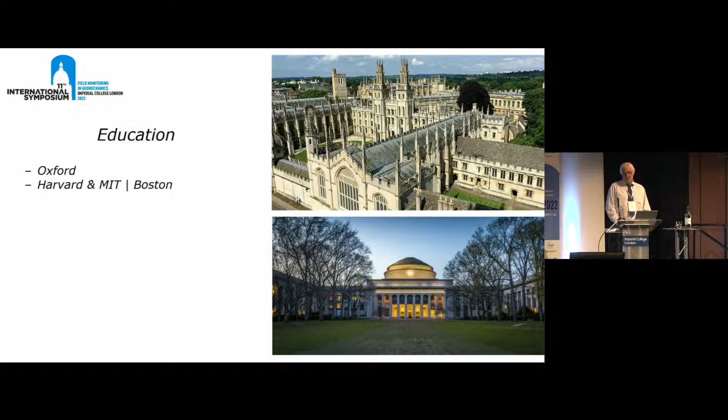That was before becoming an independent geotechnical consultant in 1979. John was well known for his participation in the Central Artery project in Boston, which was a big project that lasted throughout the 1990s. He often lectured about this experience gained throughout this project. But the list of projects he worked on is much longer and included the list here.

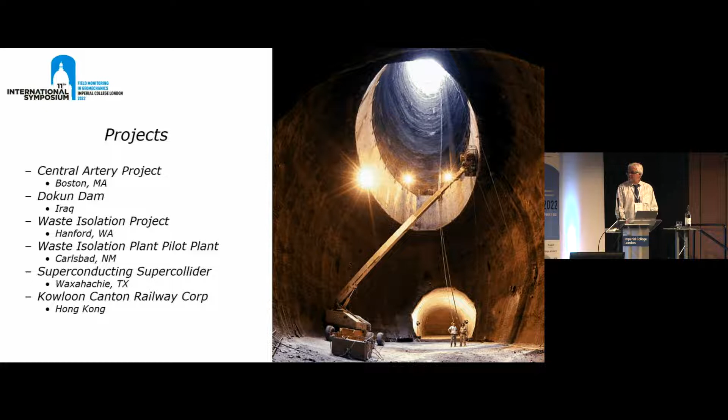Dokun Dam in Iraq, where he worked with Malcolm. The Waste Isolation Project at Hanford in Washington State. The Waste Isolation Pilot Plant in Carlsbad, New Mexico. The ill-fated Superconducting Super Collider in Waxahachie, Texas. And the Kowloon Canton Railway Corporation in Hong Kong. So he had quite an illustrious portfolio of projects under his belt.

As for educational courses, short courses, John was responsible for more than 100 continuing education courses and seminars on geotechnical instrumentation and monitoring. The courses were held or sponsored by the Federal Highways Administration in the USA, where John lectured to most of the US state DOTs. The first courses, as we know them today, were held at the University of Missouri in the USA, then at the University of Wisconsin, and then at the University of Florida.

At the urging of many colleagues, in 1983 John started to write a book, Geotechnical Instrumentation for Monitoring Field Performance. It was published by Wiley as a hardback in 1988, and then republished as a softcover in 1993.

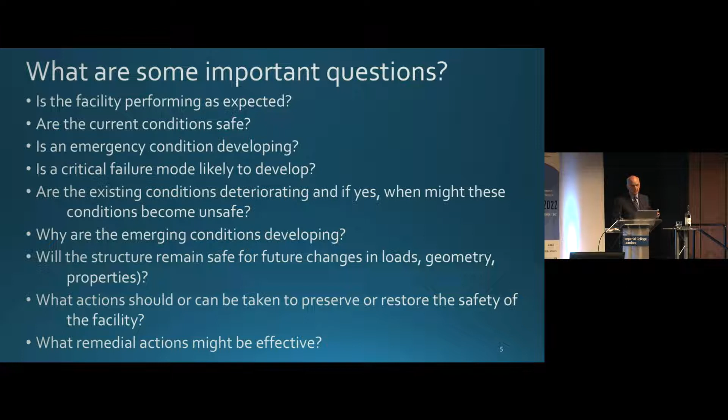Yeah, and with an instrument we can start getting more to the heart of what is the cause of the problem and devise the most appropriate fix. Instrumentation is really valuable there. And what remedial actions we're considering might be the most effective from a performance standpoint, not just the lowest cost.

So I want to shift from that to, as I listened to John talk about questions - and I don't mean to be negative at all about him, I learned a lot from him - but that approach does raise some issues with owners. Now what do you mean? I've hired you, I'm paying you a lot of money to come in here and say what questions need to be answered, and it doesn't always resonate well, particularly with designers.

And so he and I talked, and we kind of got around to the idea that what we're really talking about here is risks, that we're trying to help gather data to help manage risks. You think about instrumentation and monitoring - almost everything we do ultimately is aimed at minimizing, avoiding disastrous risks.

So just to remind us, what am I talking about? Risks are about unknowns and uncertainties. We in geotechnical engineering certainly know a little bit about unknowns and uncertainties, I think, right? We're taught that from the beginning. We have so much trouble characterizing soil and defining it with fixed numbers.

And even when we've done a thorough site investigation and a fairly advanced analysis, we go to a design, go into construction, we still have a lot of uncertainty. Instrumentation starts to reveal the truth. It starts to show us how the site is really going to perform.

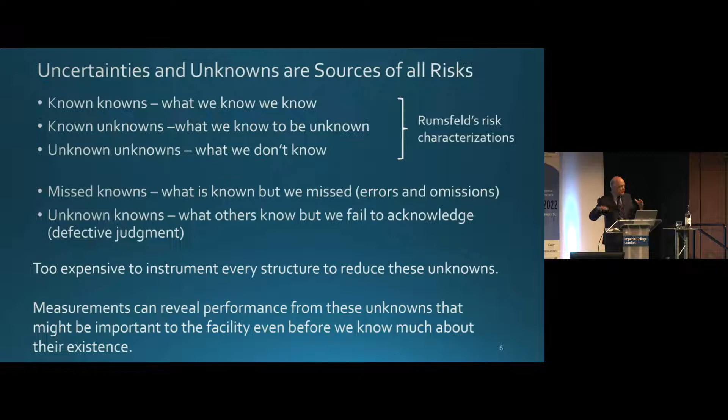Performance measurements can help us. We don't have to reveal all those unknowns, we just have to see what is the performance. We can measure performance and not necessarily know what caused it, but it's enough to help us know whether we need to stop or go ahead. So I think measurements, performance measurements, provide us with a huge bridge across the large quantity of unknown information that we have to deal with.

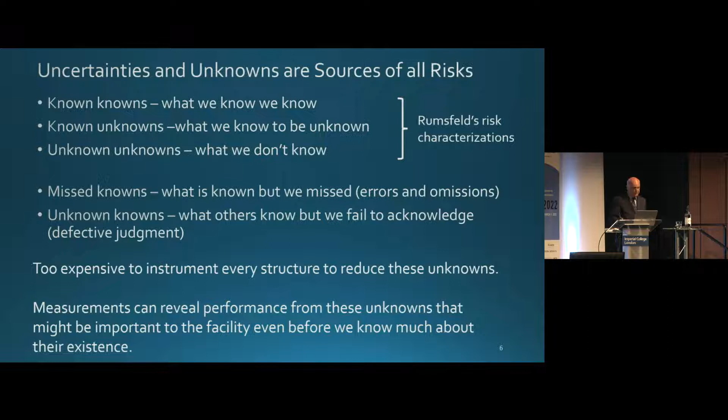Just think of the x-axis as like deformation - how much is the building going to settle? Ahead of time, we don't know. There's uncertainties, we're trying to make a prediction. And our prediction might be a distribution, really, reflecting our uncertainty. It might be 1 inch, it might be 3 inches, it might be 6 inches, it might be 10 inches. We don't know.

But we have some idea that the expected value might be at the peak of this distribution. Those of us in measurements say, okay, that's kind of what I expect to get, so we'll set a threshold value that if my measurement is above this, I'll start getting a little worried, and if it gets above the limit value, I'll stop work.

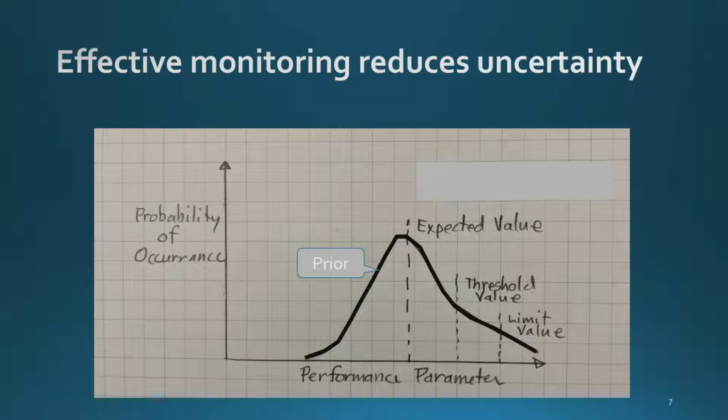It's an interesting way to think about it, because what those values really reflect is the degree of uncertainty we have in our predictions of expected performance. So at the time we're designing and starting to build, we're really dealing with this probabilistic distribution of the expected performance.

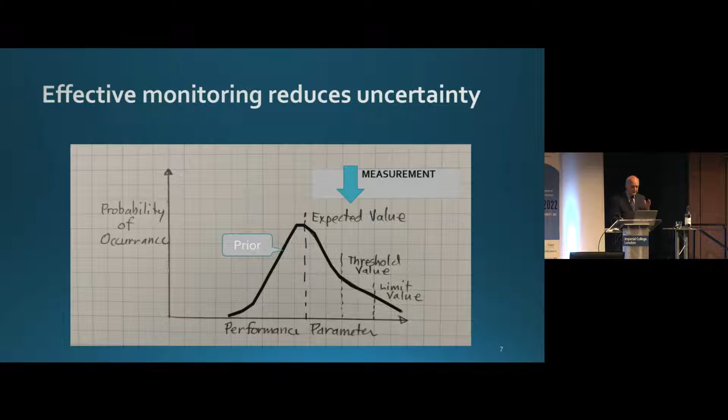The reality is, when we get a measurement, it tells us exactly where we're at. It removes those uncertainties. That's really helpful, really insightful to think that the power of performance measurement is to open up the uncertain world into certainty on a specific thing. I think that's an important insight to help us talk about the value of performance monitoring.

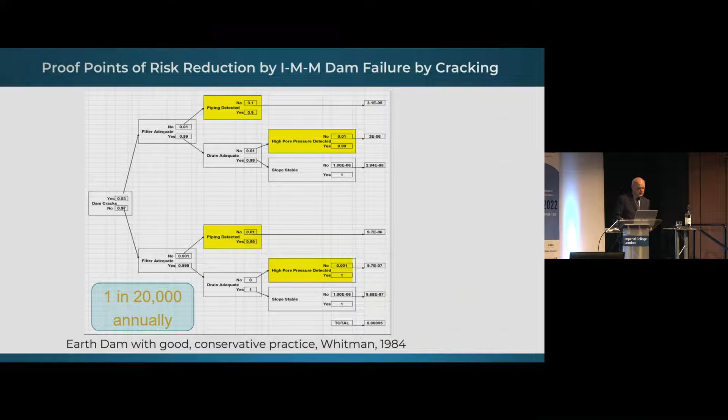Now, I always look for examples, proof points, and I was reading one of my colleagues' Terzaghi lectures, Bob Whitman, great man, very smart man. We were working on some dam issues and the probability of failure of dams. I'm sorry you can't read this event tree, it's tiny, but what's in the highlighted text is what I mean for you to see. What he did is work out an event tree which included branches for instrumentation and monitoring.

So if the dam starts to fail, does the instrumentation monitoring program indicate it, pick it up in time for us to do something about it? This is all worked out in this event tree to say that in a modern earth dam, the chances of a dam failing by cracking, where you have an instrumentation program in place, is about 1 in 20,000 on an annual basis. It's low. Very few dams fail this way.

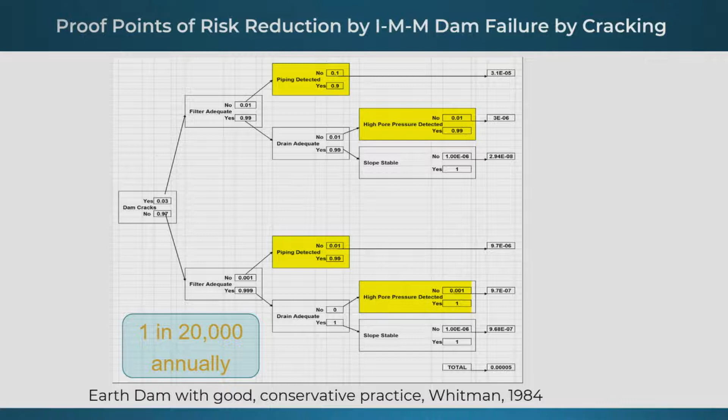But it gave me a great example, because I said, suppose there wasn't an instrumentation and monitoring program. All I have to do is pull out those probabilities - it's not my judgment, it's Bob's judgment. Without that I&M program, the probability of that dam failing in any one year from cracking goes to 1 in 500. That's pretty amazing.

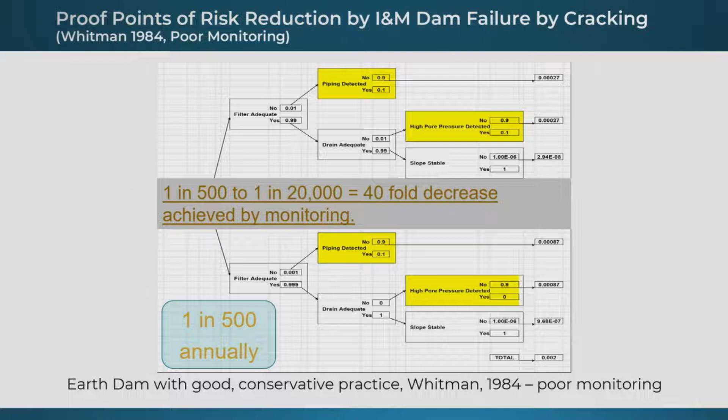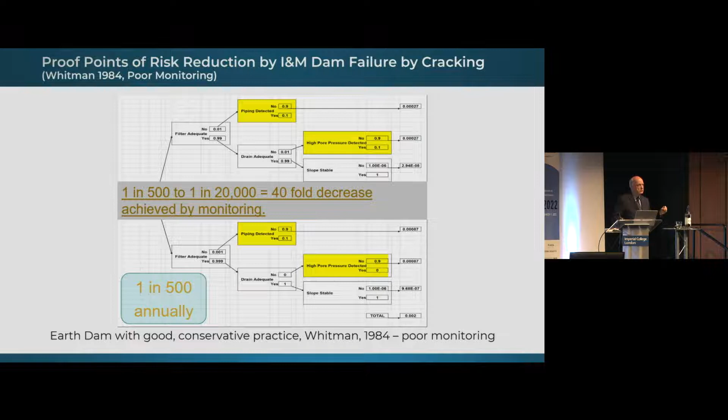That tells us that instrumentation and monitoring properly done for this particular problem, cracking of a dam, can help us reduce the chance of the dam failing by 40-fold. That's a very important factor. I was on a chase here to try to find metrics to tell me how effective monitoring is at helping us reduce probability of failure. This was one really good independent data point.

I had a friend who also had a friend at the Panama Canal, which many of you know, suffered from many landslides for many years in its banks. They had a very insightful engineer, Mr. Alfaro, who had been collecting statistics, and based on frequency of occurrence, he concluded and wrote an internal memorandum some years ago that their performance monitoring program for landslide control on the Panama Canal had helped them reduce failures by roughly one order of magnitude.

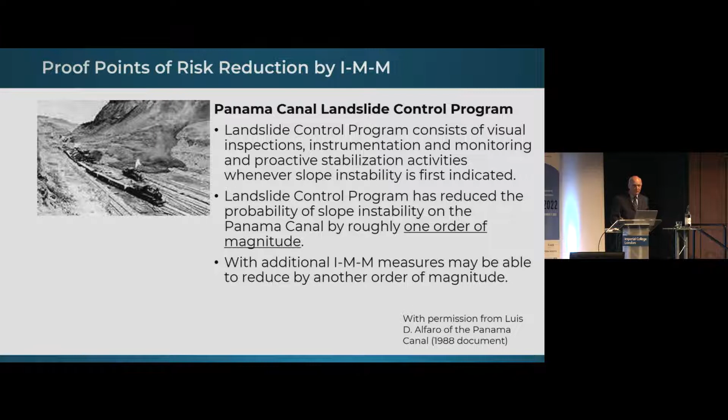I got a second data point now on the benefits of effective performance monitoring. He went on to say that with additional measures they had in place, he felt they were going to be able to reduce that by another order of magnitude. So that's 10 to 100 times reduction in risk possible through the implementation of monitoring programs.

I'll give one more example, some data on the Boston Big Dig, which Tony mentioned and John had worked on. John wrote the essence, the heart of the technical specifications for this major infrastructure project in Boston. It ultimately cost about $15 billion. My company bid on and won the instrumentation monitoring contract for this particular project, which at the time was the largest monitoring contract that I knew of in the world.

The contractors put in the instruments, but then we took over and took the readings and dealt with the reports and answering questions and stuff. It was in a very dense urban area. Here's an excavation that's roughly 33 meters deep, if I remember right, quite deep. And right next to it are all these high-rise buildings.

So major work there. They developed a very simple monitoring program. There's 7 miles of slurry walls for the excavation support system on this project. So very simple: if the walls move inward 3/4 of an inch, that's yellow.

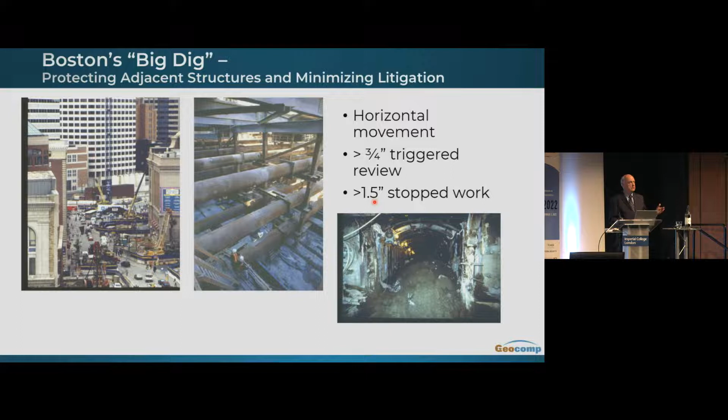If they move 1.5 inches, that's red, stop work. It was very rigorously enforced throughout that 7 miles of construction. There were two problems: one, a concern about deformations, and the other was concern about vibrations. People are very sensitive to vibrations from construction work. And in Boston, we have many lawyers, so every building owner has a lawyer, and that creates problems. So one of the biggest parts of the monitoring program was actually the vibration monitoring activities.

This is a diagram that illustrates, in a common form, peak particle velocity on the y-axis and frequency of vibration on the x-axis. The solid black line indicates the criterion being used on the project, which came from some old US Bureau of Mines study. So here are measurements, over and over again, of the peak particle velocity in buildings and the entranceways of buildings. Despite this being well below the allowable for the project, we had complaints every day, frequently.

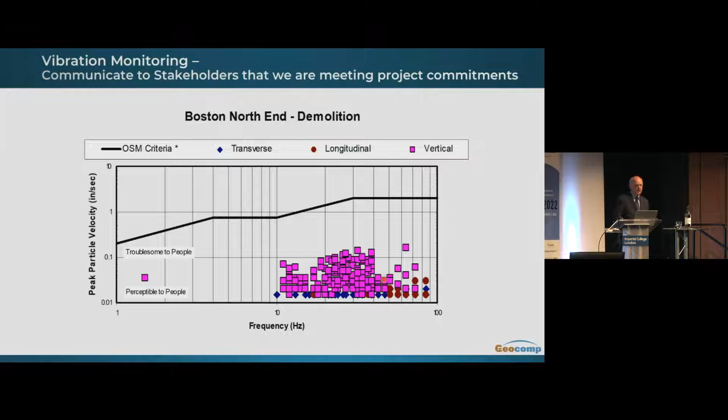So the instrumentation program was really vital. Just this simple measurement was really vital to helping us keep the construction going, even though the community was complaining. It also told us where to try to do some stuff to lower these even farther, to be a good neighbor. But a simple measurement, very valuable to the project. Had we not managed or controlled this, we could have had extensive delays from community disputes and lawsuits.

Fortunately, we didn't. I went back on the project when we finished, after about 8 years, and I'd done some work in risk analysis. This is admittedly a backward look - it's subjective, it's probably got some bias in it, but it is an attempt to capture some data on what was the value of the I&M program to this project. When I did this, I went to the project management team, some of the senior managers, and asked, does this make sense to you? Again, it's very subjective, but they agreed that it made sense. So there's some basis for it being legitimate.

We looked at what are some of the significant risks that would have resulted had we not done this careful monitoring. One was the possibility of collapses. We had several major buildings right within the construction zone of these deep excavations. They could literally have collapsed and fallen into the excavation had we not been carefully monitoring and controlling all that. So there was an estimate of potential damage, or consequence, of as much as $5 billion.

There were 10 buildings, I think. We estimated each one of those was about 0.3%. So you multiply those two together, which an insurance company would do, and you get some estimate of the possible risk cost from that failure mode. Then major damage and disruption to buildings - cracking, stuff requiring major rework - same kind of calculation, potentially a risk cost of about $200 million over the project.

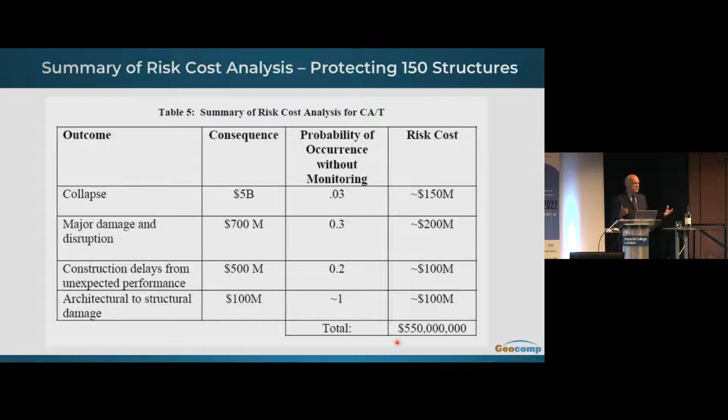So that all adds up to about $550 million - pretty serious money. How much did we actually pay due to these kinds of losses on the project? We paid $9 million to fix one building - a pretty politically connected guy, his famous building cracked, and it took a lot to fix it. So we had a potential risk loss of 550, we only paid out 9, and we paid 60 for the monitoring program.

Looking at it simplistically, this approach, which was a very aggressive monitoring approach at its time in the 90s, saved the project $500 million in risk costs. That's pretty darn convincing of value returned from a monitoring program. Keep in mind that word 'value' - as the rest of my presentation goes on, you're going to hear that word over and over again. What is the value that we are bringing to projects and to owners?

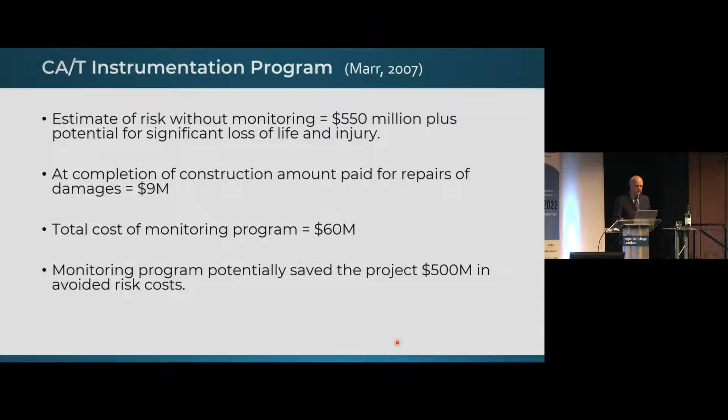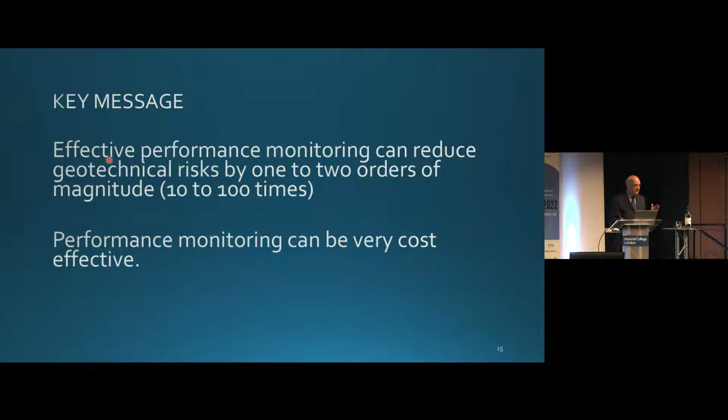Effective performance monitoring, as I've shown you, can reduce geotechnical risk by one or two orders of magnitude, and it can be very cost effective if it's carried out right. I'd emphasize this word 'effective' - just putting an instrument in the ground doesn't change anything. You've got to do the systematic approach that John talked about. So let me show you a few examples to illustrate these points a little bit.

Here's a bridge we did some years ago in Washington, D.C., called the Woodrow Wilson Bridge. It had to be raised but couldn't be raised enough to get ships through, so it's still the only lift bridge on I-95, a major north-south road in the U.S. To do this, the approach embankments used MSE walls, very high, 60 feet high, on very soft soils in a very crowded work setting.

So this is one of the MSE walls. This is a drill rig next to that MSE wall. Anytime you're in this condition and you see a drill rig, you know there's something wrong. And this is an inclinometer that was sitting there showing the lateral movement of that MSE wall as it was being constructed.

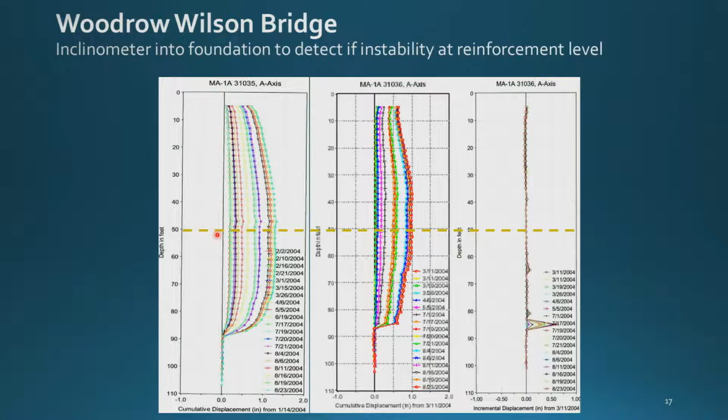What we were worried about is that MSE wall at the base of the embankment had the highest strength reinforcement made at the time. This is plastic material put in like reinforcing steel to help hold the embankment from squeezing out. So we had a lot of instruments on that to make sure that man-made material was serving its purpose. And that was all doing good.

It didn't move there. The problem is we had movement starting to occur down here on this inclinometer, deeper in the original foundation. This is the kind of stuff John was really good at - make sure the inclinometer goes deep. And in this case, we had it deep enough.

We picked up sliding occurring along an old ancient slip plane in this over-consolidated clay. No one anticipated that. If we had not had this instrument in place, this whole thing would have slid. If we'd kept putting fill on this embankment, it would have slid and we would have lost access and a year of construction time. Huge value from one instrument.

And so that's just one example of the kind of value. It's an example too of many times instrumentation reveals unknowns that we didn't think about, we overlooked, or didn't consider when we were doing design.

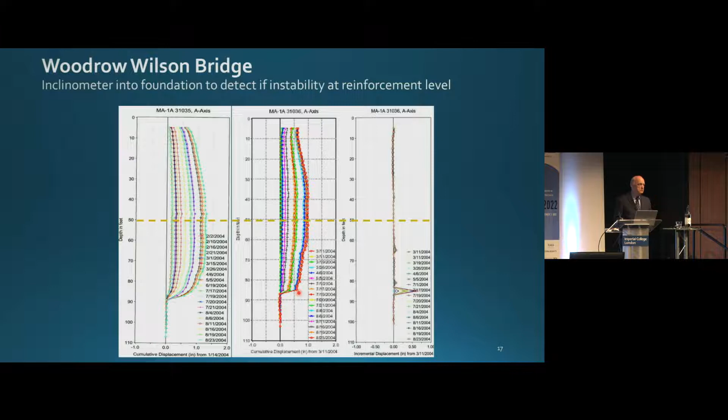Here's another example, one of the few new hydro plants built in the United States. This is Low Head Hydro on the Ohio River. It's built in a deep excavation, 100 feet deep, next to an existing Corps of Engineers dam. And the Corps is very finicky about its dams.

Thou shalt not move my dam. Thou shalt not hurt my dam. So we figured a smart way, a helpful way to do this, would be a lot of instrumentation, real-time monitoring. In order to build this, I helped do the engineering on this as well.

They're like 49 strands with 35 kip capacity each, if I remember right. We also had to deal with an existing fault plane that we had identified in the site investigation, coming underneath the toe of the Corps of Engineers dam and across our site. So it was really critical that these rock anchors work, that they take up the load they need to hold this water force back and hold this rock in place.

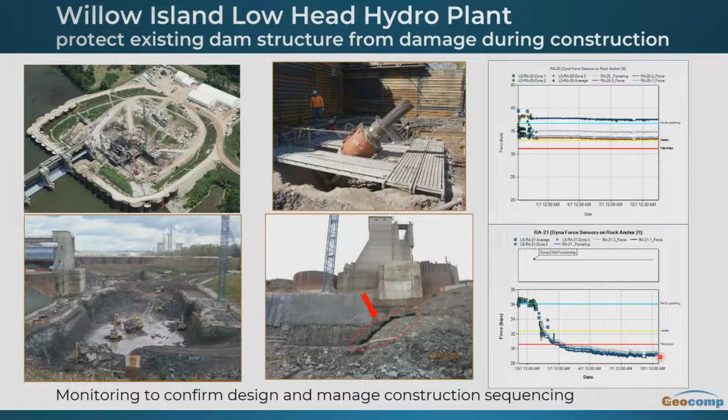So we had to accept the fact, let's just live with it for a little while and see what happens. It lost a little bit more load and then it leveled out, and we could live with that because the adjacent tiebacks could take up those loads. So this is an amazing story of how new technology can come in and help us if we're careful.

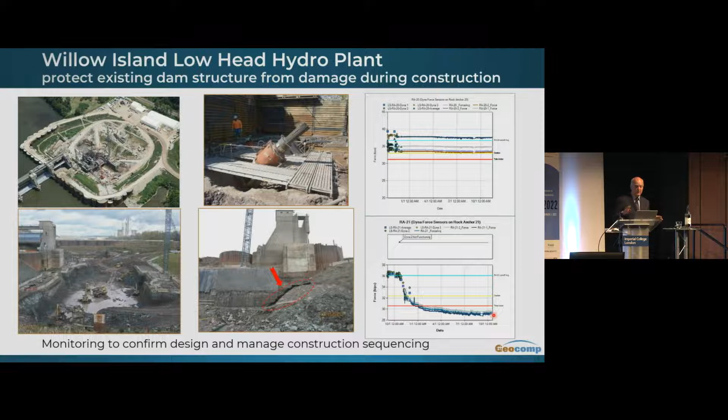It doesn't always work so well, and in fact, when these were first put in, they gave us a lot of crappy data. It turned out to be a poor installation, and we cleaned that up, and then you can see what the result was.

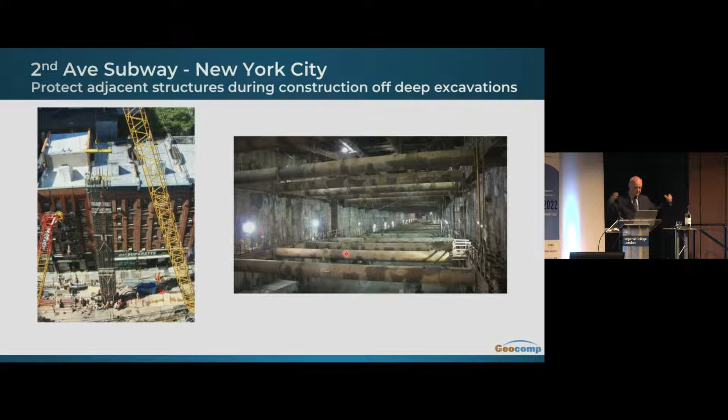We were the instrumentation contractor, working for the contractor, and I said, this ain't never gonna happen. And he said, well, what do you suggest we do? And he said, well, we have no choice. You bid the job, we gotta do it. We'll learn as we go.

Kind of sounds like the observational method, doesn't it? We didn't call it that, but the idea was, as soon as we triggered this, we went in and said, hey, look, there's nothing wrong with the building. There's no harm. We can't foresee this building having any serious damage for another 2 inches of settlement or so. So the limits were revised upward.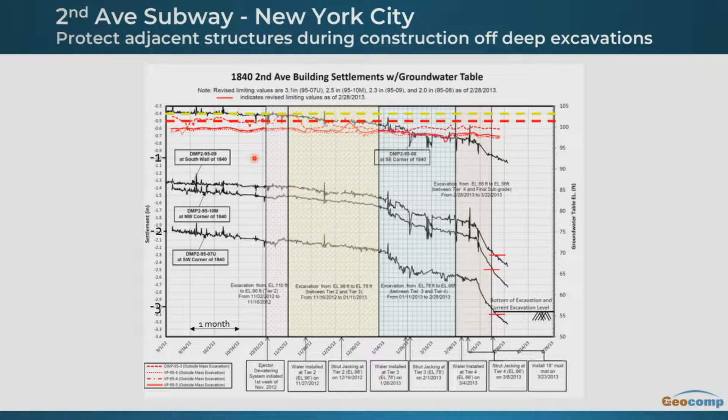That's a key message I try to get out to people: limits are there to be considered and revised if needed. Many contracts, though, give it, and the contract administrator thinks that's fixed, that you're cheating the game if you're trying to move it, trying to change it.

We revised the limits on this. I mean, I personally took responsibility for revising the limits on this, I think it was 3 times. And we got down, eventually this building settled a little bit over 3 inches. We're starting to get real worried.

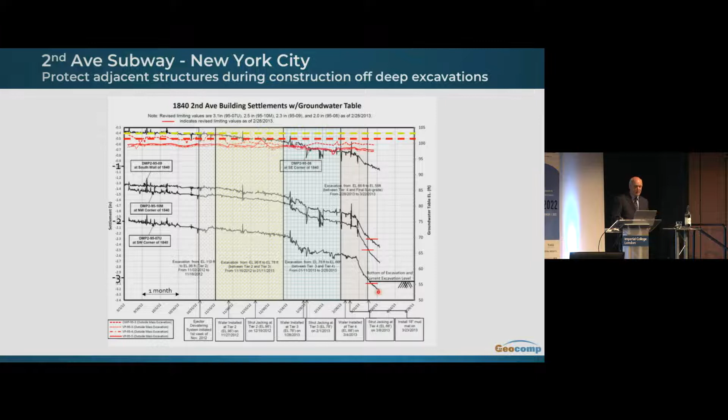You see it took off here as we were getting toward the bottom of the excavation. We went to the sequential part where we just took out a little bit, put in a strut, and watched what happened, poured the bottom, and then moved over. That worked very well, and we were able to succeed. We could not have done it without the instrumentation, though, telling us. We knew we were in a tough spot, but the instrumentation was allowing us to move ahead.

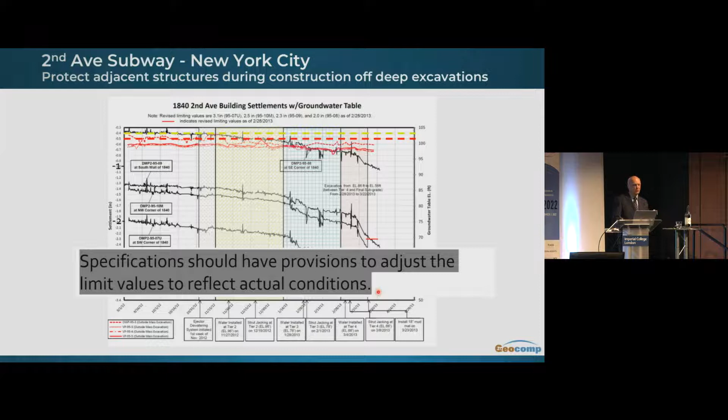So again, specifications should have provisions to adjust these limit values to reflect actual site conditions. Limit values are set up front where you don't know so much, but as you get on the site and start working, you learn more, you see how the structures are behaving, and you ought to be capable or allowed to adjust them to actual site conditions.

This is an example of some of the damage that happened to some of those buildings. Joints, we've got cracks here - I think this one is up to 1 inch wide. Got cracks within the buildings. This was someone's bedroom, if I remember right, another bedroom.

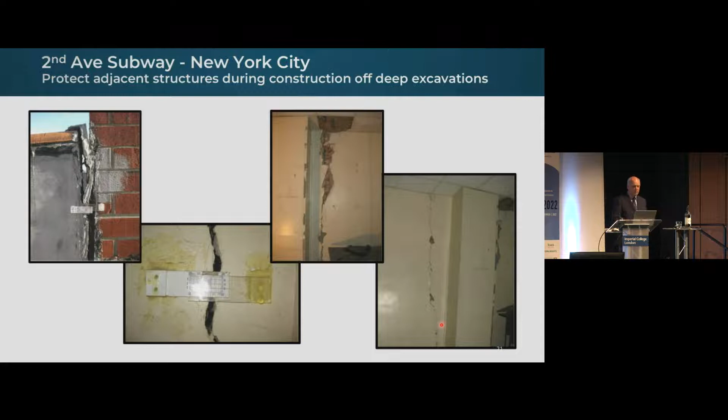To lay people, that looks kind of serious, but from a contracting standpoint, this is easy to fix. These aren't structural, they're visual, and so we deal with that a fair amount, as long as we've got instrumentation to help us be sure of how the building is moving and how to interpret these cracks. Don't know what happened here, somehow I got something in there - let's go to the next slide.

This is a bridge, another example of an old bridge. The new bridge has got to be built because this one is obsolete. The new bridge is coming beside it, and new piles have to be driven. We're very worried about settling that old bridge and it literally collapsing into the river as we're doing this work.

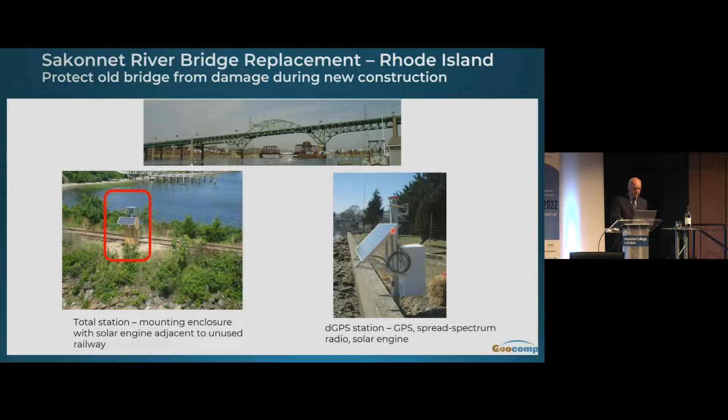So we put in a monitoring system on that bridge consisting of automated total stations, robotic total stations. And then to be sure that we had it right, we backed that up with some differential GPS just so that we knew that this unit wasn't moving. This uses satellite data to tell us how much things are moving in X, Y, Z. Amazing device, good to about 1 millimeter and works day and night. So we had good luck there.

We got it all in. We had several hundred instruments on this to monitor deformations as well as strains in the structural steel. We're sitting around one day, people are sitting around, and all of a sudden the real-time monitoring system sends off emails to multiple people, some who are having lunch, and it says the deformations have exceeded the limits, there's something wrong. What's the first word out of the contractor's mouth?

"Your instruments ain't working." That's what we always get. So we send some guy out to see what the contractor is doing, because our answer is always, you're doing something you didn't tell us. Turns out the contractor had decided to drive a sheet pile for getting ready for one of his pile templates for his main 6-foot diameter piles. And it was very close to one of the piers for this old bridge, founded in silts, very sensitive silts. So that smaller pile driving operation, but a little closer, caused this foundation to settle immediately half an inch.

Wow, that was a wake-up call. It said, yes, this foundation is really sensitive, and we better be careful going forward. That in itself was worth an enormous amount of stuff - we got credibility with the contractor that he had to be careful. Fortunately, we were able to use the strains on the structural steel to say no harm had been done. They came in and, again, using our instruments, were able to jack it back to where those stresses were restored, and went on and completed the job without a problem.

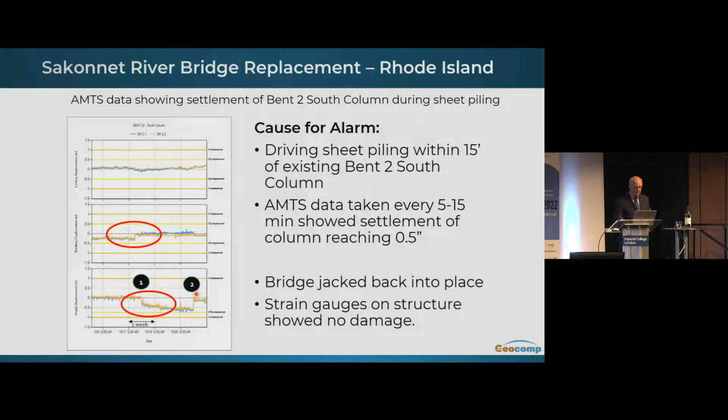So this is an example of unexpected, unanticipated benefits of a good proactive instrumentation program. It tells you the truth, right? And it tells you the basis to argue against the doubters and gives you a basis for how to fix a problem. Another example - and this is where you were using instrumentation in a different way.

If you assume a hydrostatic condition below this line, as I said, we went in and put in piezometers, grouted-in-place piezometers, and measured the actual pore pressures at different points. This represents how high the water actually was at this point, and how high it was at this point. That's way below the phreatic surface from an assumed simple condition.

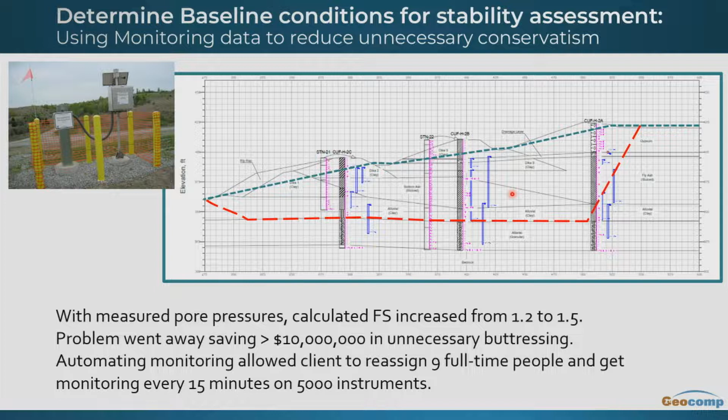That means the pore pressures along this failure surface are less than half of what that conservative assumption was. When we took that into account, the factor of safety calculated for this condition went from 1.2 to 1.5. That's huge. The problem just went from a $10 million buttress to fix this project to no cost, and much more confidence in the actual safety. That's all brought about by good practical use of piezometers. We don't do enough of it in much of engineering.

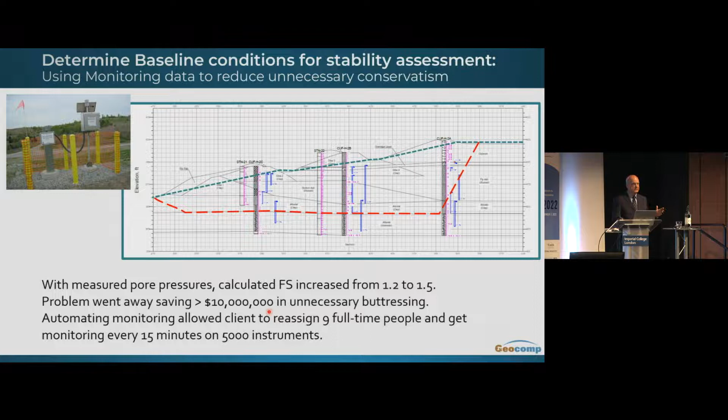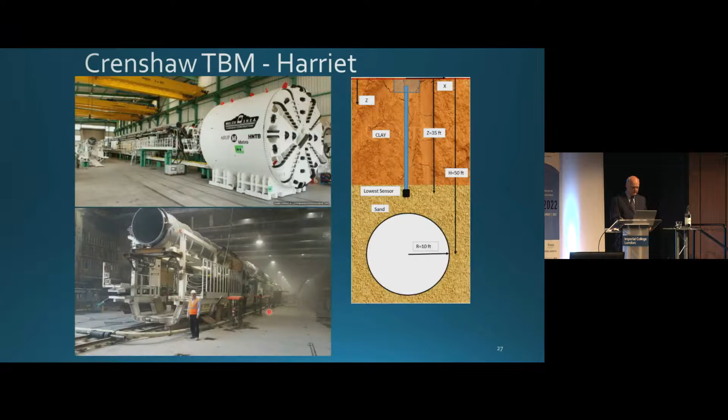Believe me, this paid for itself many times over. In fact, we wound up redoing the full monitoring system for this client, and they had 10 people working full-time trying to keep up with all their 5,000 instruments. They now do it with half a person, through automation. Those are huge benefits to companies, and we need to try to pull those out. That's huge value generation to a client. I'm going to skip this one in the interest of time, although it's a great story.

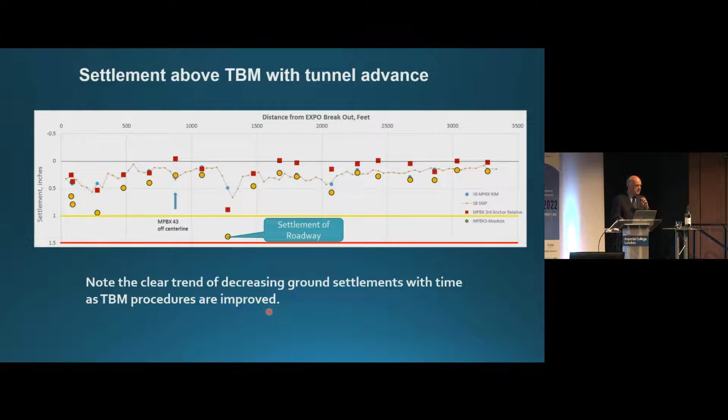It's meant to illustrate how, on mining with TBMs these days, using instrumentation as feedback to the operator, we're now able to control settlement of the streets to zero. That's really a great step forward. This was a project in LA where we were able to get to that. By seeing if settlement's occurring, they alter their tail grout operation so that it's really able to keep that street at a constant level.

One interesting side effect of that same project is on the stations. These are open-cut stations with retaining walls with cross-lot bracing - not rakers, cross-lot bracing, I'm trying to think what the British call it. Normally, when you do a deep excavation with a strutted supported excavation, you expect the ground outside to settle. Every engineer knows that, right? At least in Boston, that's what we always think. In this case, the engineer had predicted that the elements outside the excavation would settle about an inch.

So we've got all these points measuring settlement outside of and around the excavation, and they're showing data that at this point there's as much as almost half an inch of heave. So who called me up and said what? 'Your instruments are wrong, they ain't working, you've got them upside down, you've got your reference points wrong, something's wrong.' Oh no, we know what we're doing. This is right. 'No, we don't believe you.'

So I had to pay for a surveyor to come in and independently check all this stuff. He was right, we were right on the money. We had it right. So everybody's scratching their head, wondering what's going on. And they look to us as the instrumentation contractor. Look, I'm just an instrumentation contractor - I happen to be a geotechnical engineer too, but I was hired there to be an instrumentation contractor.

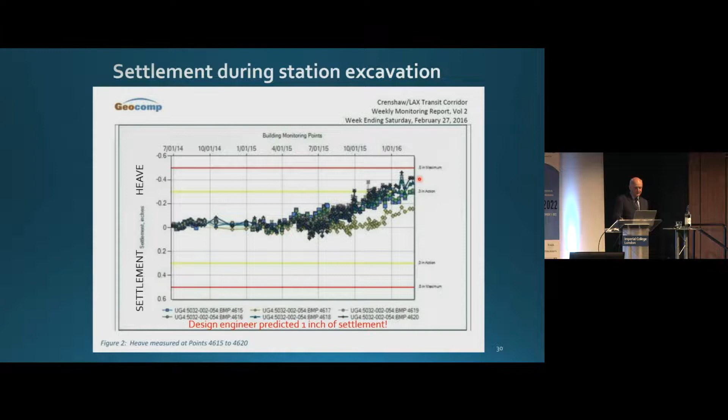So let's see, one more I want to show where I'm just baffled sometimes at where we get caught, and instrumentation saves the day.

We went out and set up an automated total station. We measured this over a period of 8 months, and sure enough, it was moving. This thing was coming off the mountain at a pretty steady rate. And nobody could figure out why that was happening.

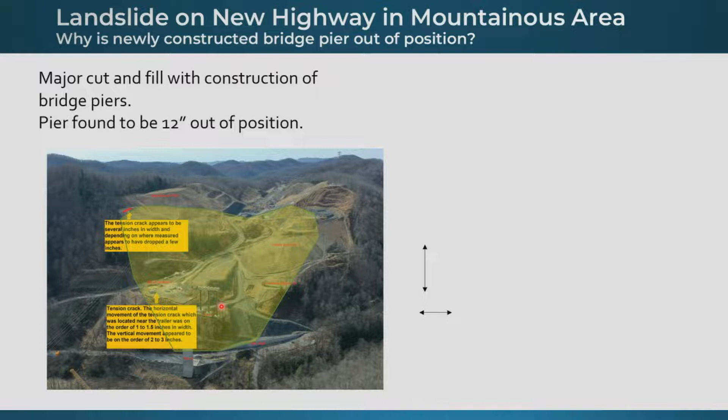We were involved doing a site investigation and went and put in piezometers. Whenever you see a slide like this, pore pressures are inevitably involved. I went back and looked at the original contract borings. They didn't show any pore pressure. All the borings were dry. So how could there be pore pressures here?

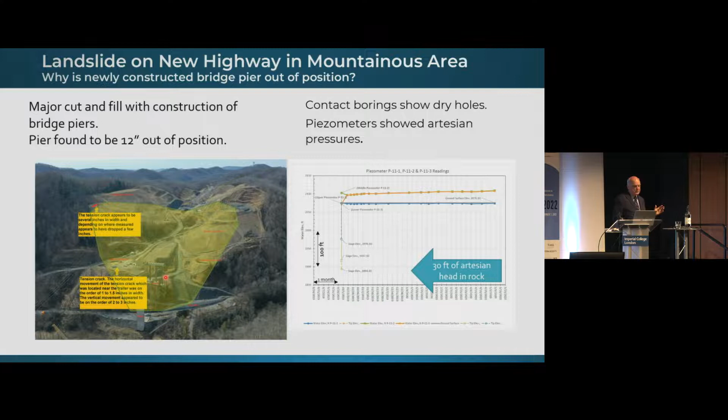So we put in piezometers. The piezometers not only showed pore pressure, they showed artesian heads in some of the rock. That means water pressures above the groundwater level, above ground surface. Artesian heads of as much as 30 feet in part of the rock. And that part of the rock also had a pre-existing slip plane in it from old geologic forces. So here we go from contract borings saying dry holes to piezometers during the actual construction showing artesian heads. That's just total topsy-turvy of what was anticipated.

So what's the solution? Put in horizontal drains. 'Oh, they never work, what do you mean?' 'Oh no, they're always clogging.' No, you've got to do stuff right. You do stuff correctly, and you do enough of it, and they will work.

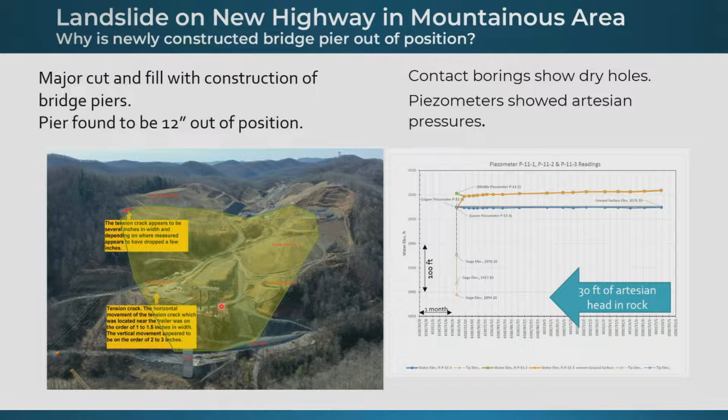So we convinced them finally. In fact, I said I'll leave the job if we don't do horizontal drains. We did horizontal drains. Here's just one of the drain pads. I think you can see water coming out of those 1.5-inch pipes. In fact, we get about 200 gallons per minute after a rainfall on this mountainside.

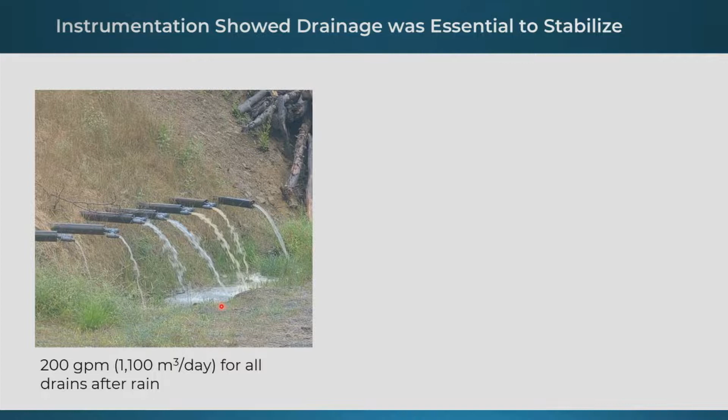Huge water pressures were building up at times and creating the instability. Once we put those drains in, here is a plot showing the movement of that pier over time. The scale here is 6 inches of movement, and it almost got to 6 inches. Here's where we got the horizontal drains in and working, and the movement stopped.

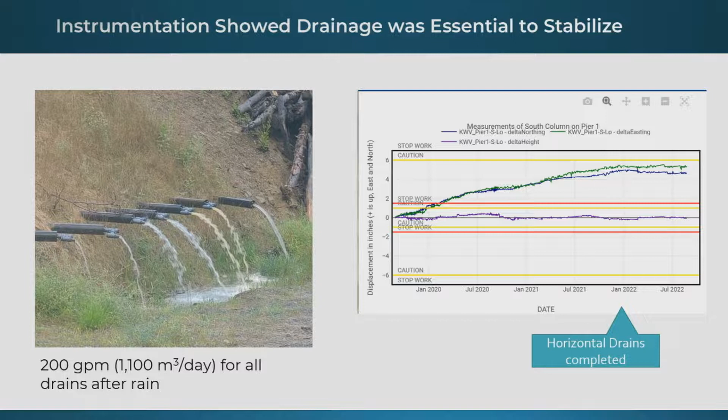That's a hell of a convincing story. That's a place where we can go back to the owner and say, we have solved this problem. We've got the hard data to prove it. This is not theory, this is reality. And we can go to court and win a court case for a differing site condition, hopefully. Again, instrumentation playing a very key role.

I'm going to skip this one.

Monitoring delivers value in safety, improving safety, saving time, saving money, and reducing risks. We need to develop and execute our monitoring programs with these objectives in mind. How are we saving money? How can we reduce risk? And then we need to document these, because these are value statements.

This is how we help owners save money and save time. And we don't do enough of this in the monitoring world. We do a great job of putting the instruments in and collecting the data and making nice plots, but we don't translate it into value statements. I'm going to talk some more about that.

So key components of monitoring: visual surveillance, and that's just as important as it ever was. It's becoming more of an issue, though, in some ways, in that we're automating all this stuff and our people aren't in the field anymore. So we don't get that daily feedback on many of these projects.

We've got to put in the appropriate and reliable instruments in the right places. So many instruments don't go to the right place. They don't think about what is the expected performance mechanism here, and then where do I put the right instrument to detect that particular performance mechanism.

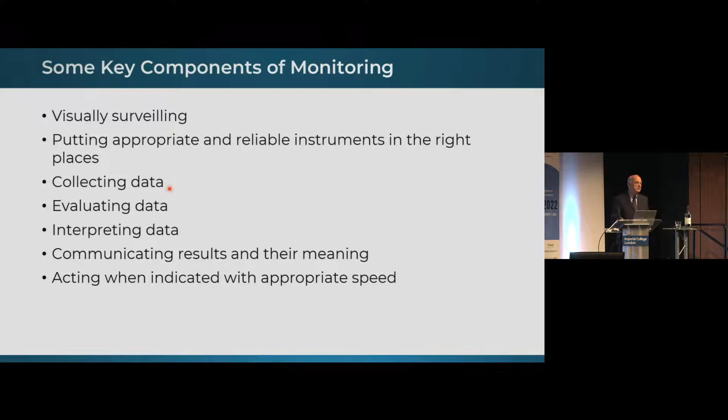Collecting data, you all know about that. Then evaluating and interpreting data, communicating the results and their meaning, and then acting when something is indicated that needs to be done, acting quickly or with the appropriate speed. Again, to go into these in a little bit of detail: visual surveillance - Ralph Peck said the most valuable instrument we have is the human eye connected to a working brain. And that word 'working' is really important.

And he was absolutely right. As I indicated, automation has kind of taken us out of the field, but there's a new technology development that's bringing us back, and that's these wonderful remote pan, tilt, and zoom video cameras.

I'm just now putting a bunch of those on some dams in Puerto Rico. I'm amazed at what they're going to do to feed back to a central room and let us look in on a dam after a storm and see, is it overtopped? Is it losing water around the sides? What's happening at the tail downstream end? Just incredible technology, and costs have come way down. We're going to make a big deal out of this.

And then drones with a camera and positioning, so you know where you're at, is also adding a lot of new capability to us.

One of the things on my list was evaluating and interpreting the data. We need to be careful there. There's a difference between evaluating and interpreting, and different people are good at doing these two different tasks. We confuse them a lot. Evaluating means making sure the data are good, making sure they're solid, tight, believable, error-free.

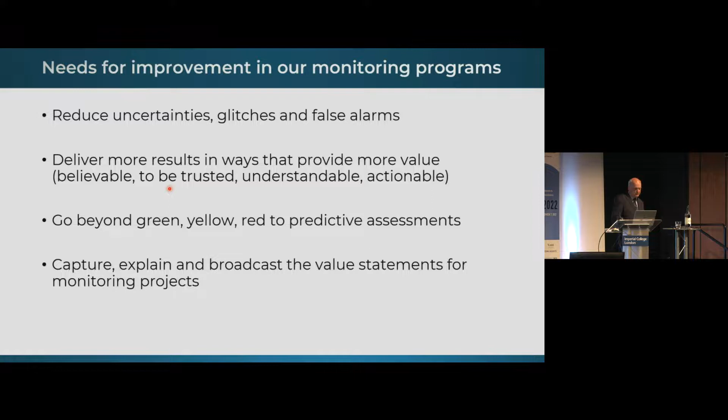So, thinking through all this, I thought I'd put together a few pointers on improving things we could do to improve our monitoring programs. We certainly need to reduce uncertainties in the delivered data, glitches and false alarms.

Every place I go that has an automated alarm system, people complain about false alarms. I've just been through several major dams, fairly new dams with instrumentation, and half of it isn't working. And why? Well, I don't know, but that's not good, and it doesn't reflect well on our industry.

We need to be delivering results in ways that provide value. That word keeps popping up here. That means the data are believable, they can be trusted, they're understandable, that whoever's receiving that data knows what they mean. In these days of higher technology, I worry that we're delivering stuff that's just hard for others to understand. And in this world, many of our clients are not engineers, and yet they're still responsible for the facility.

So we need to work hard to make some of this stuff understandable, and it's got to be put into a form that they know what to do with it. That is actionable data. Just delivering a bunch of volt readings that are all reliable, everyone's there, nothing's missed, but it's voltage, doesn't give them any actionable data at all. They don't know what to do with it, and they can't use it right away.

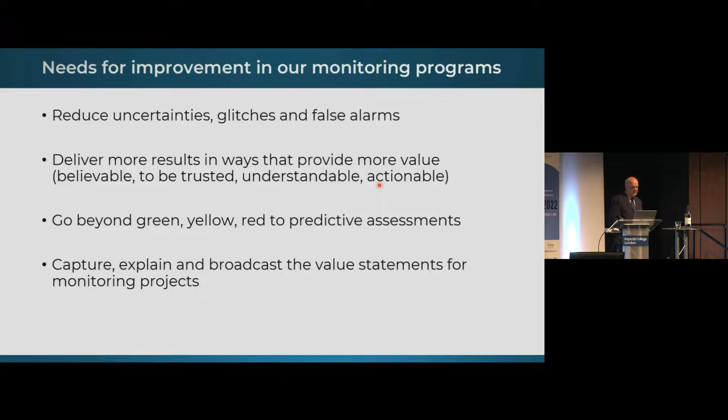There's also some things that feed into these things that don't go well. I tried to make a list of some of these things that really stand in the way of us doing better I&M projects.

One of the very first ones goes back and violates a rule that John gave us in his systematic approach: every instrument should have a purpose. That's very simple, very clear, and yet many projects I'm on, I got a list of instruments, no idea what's the purpose of the instrument. That really should be front and center. In fact, I'd love to see a table that shows the purpose of the instrument, the range, the trigger or limit levels, and how important it is to the project at what phase of the project.

There's a whole bunch here I won't go through in detail. Many of these are obvious to you. John always talks about planning, or what many of us talk about. Plan before you ever go to the job, but then what happens to the plan?

Instrumentation crews seem to be made up of a bunch of cowboys. Everyone knows the best way of doing it, and they just go out and do it their way, which usually means it doesn't work the first time. So we have a lot of issues in instrumentation with reworks, and I'm being honest, that's at least with some of our crews. We just got to up our game and be much more diligent about perfection every step of the way. John used the example of a chain is only as good as its weakest link.

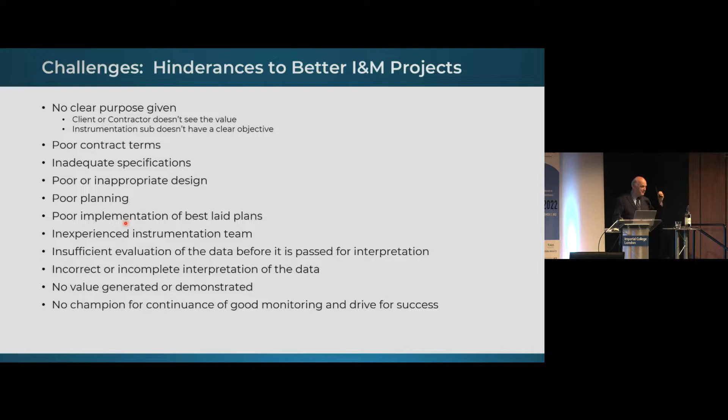John used to also say, keep it as simple as possible, right? KISS. To him, that was a very, very simple thing, like a ruler and a pencil. What do you have to say about this guy? That's about the most technologically sophisticated device you can have, yet we all rely on it. It kind of violates the keep it simple, stupid rule, but we rely on it. Let's go on from there.

We can say all these things and talk about the gadgets. We'll hear a lot of that in the next day or two. We've had a very sobering experience in the last 2 years with the failure of the Brumadinho Dam in Brazil, a tailings dam. I'm going to quote from the expert report done by the Vale expert panel.

I'm going to read it. The failure, this was, by the way, most of you have seen it, I'm sure. It killed over 200 people. It was a liquefaction failure, very fast once it got going. The failure is unique in that it occurred with no apparent signs of distress prior to failure.

High quality video from a drone flown over Dam 1 only 7 days prior to the failure also showed no signs of distress. The dam was extensively monitored using a combination of survey monuments along the crest of the dam, inclinometers to measure internal deformations, ground-based radar to monitor surface deformations of the face of the dam, and piezometers to measure changes in internal water levels, among other instruments.

None of these methods detected any significant deformations or change prior to the failure. That is really a very concerning statement to me. Now, I'm not getting into the details of this. I actually have done some work on this dam. I can't get into the details of it, but I think it's a wake-up call to many of us, as we can do better than this, and I know we can do better than this.

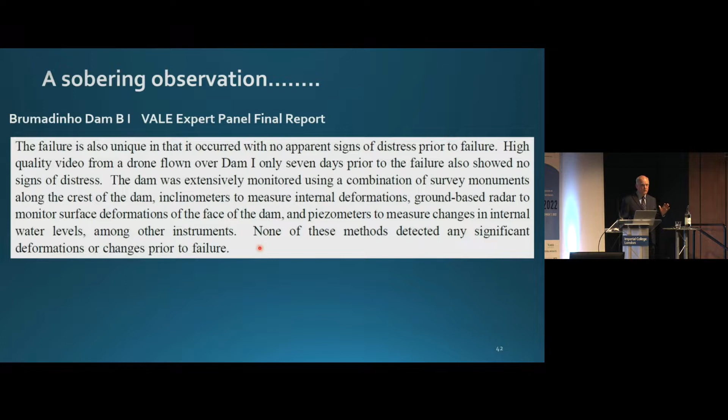But this doesn't sound well for our industry. We need to fix this. And we fix it by doing what John told us to do: systematic approaches, well-designed, well-executed designs, and then getting the data and doing something with it properly.

I wanted to talk a little bit about increasing the market for I&M services, for monitoring services. I would allege or suggest that we can do that by delivering more value and making clear to our clients and customers that we're doing that and what that value is. We've got to demonstrate and communicate value.

We can deploy new technologies where they work, or when they work and provide value. By that I mean, don't get out too fast on a new technology. When it's proven that it's going to deliver good results, believable results, and provide value, then we deploy them.

And then we can develop broader applications of some of our work. I think there's new things coming that we can do well beyond what we typically think of as geotechnical monitoring.

So in terms of delivering value, there's some rules of thumb here. Setting realistic client expectations and delivering on those is just a basic thing. Too many people will oversell and underdeliver. So you got to reverse that. You got to underpromise and overdeliver.

I think we should be trying to do a better job of integrating design, construction, and monitoring teams for interpreting data and executing contingency work. We've heard others talk about the separation. We need to pull people back together. Understanding data and what to do should be a team effort, and it definitely needs to involve the designer who knows the design intent.

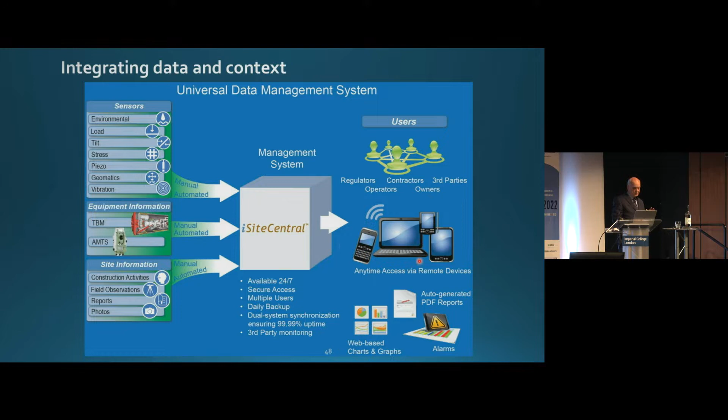We can do a better job of integrating data and context, and this is just an illustration of where today we're able to bring in not only data, but site information, photographs - almost anything can be put into server farms now and then delivered out to the end user, including to their phones as we show here. There's real value in this because you're communicating information quickly, efficiently, and accurately. And so people can make decisions and move on.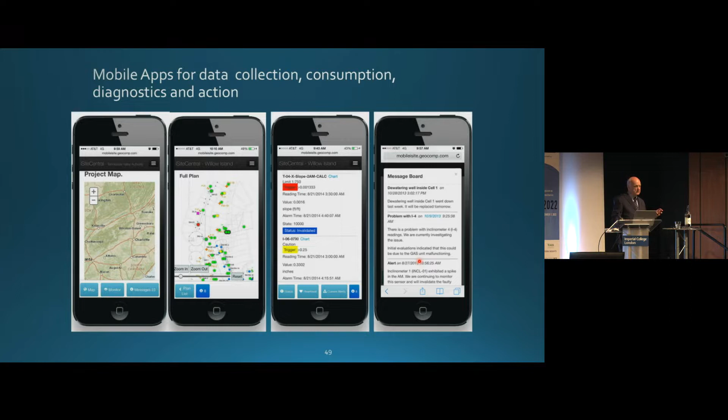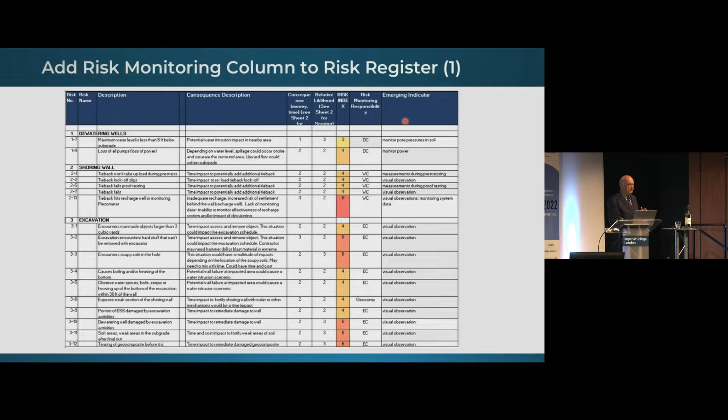I'll skip that. Oh, I did have an example of a risk register in here, but it's so small that I won't bore you with it. But you can see where I'm trying to add in the emerging indicator of risk and how we might monitor it. Many of those for risk management is visual.

Another area of future opportunity in monitoring is using existing infrastructure to develop and implement emergency and early warning systems. I'm doing some work on dams right now where this is going to be really important. There's a lot of people moved in downstream of these old dams, and there's not much option to manage risk other than to tell people to get out of the way if the dam is failing. These are some new, very interesting challenges to address.

Other new types of technology that I think are going to become very interesting - and I want to plug here my friend Kenichi Soga at UC Berkeley, formerly of CSIC - are distributed fiber optic cables, used in things like drill shafts, where you take the fiber and circle it up and down the drill shaft four times. It's one single fiber going up and down, giving you a strain measurement every meter or so, maybe even every half meter.

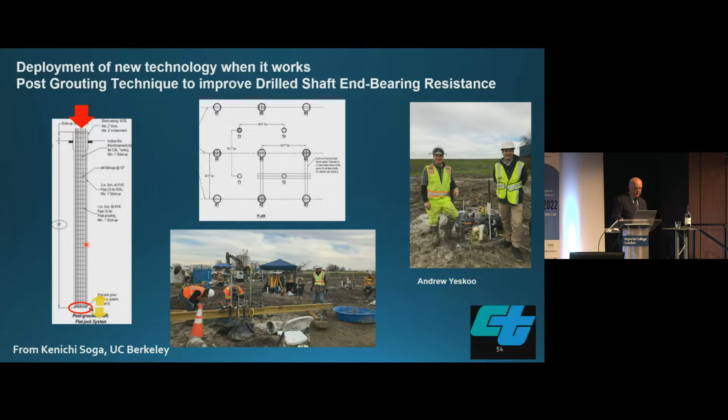They used this in load tests of drill shafts, measuring strain with depth for different experiments. Look at the amount of data coming out of that shaft, where the depth is 35 feet long. The quality of the data on strain, which we can use to get load, is amazing - this was actually a pile loaded through the center. Look at the variability of strain measured at each of the four locations through that single fiber cable. Amazing data, telling us about the load lost in that pile along its length due to shaft friction. The whole system can be left in place and used during service life.

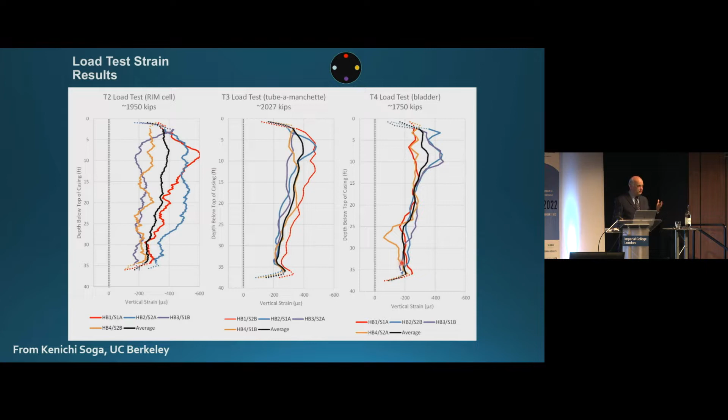So you can see how all this changes. This is the kind of world we're going to be entering with time, if we can deliver high quality data that has trustworthiness to it.

And then one other piece is using INSAR data in ways you would not have thought of. This is the San Luis Dam in California we're working on. It's 382 feet high, going to be increased in height, but more importantly strengthened and buttressed against earthquake loading - the material in it isn't strong enough to resist an earthquake. So they're going to go into the toe of the dam, widen it out, and build a stronger buttress on the outside. Now, one of the cardinal rules of the Corps of Engineers and Bureau of Reclamation is thou shalt not excavate on the toe of an active dam, and this dam has got a lot of water in it, so they're in kind of a bad place. But they're going to proceed with the work.

The lake's drawn down 200 feet, and we're beginning an active monitoring program. The concern is: if the lake has to go up, what's its effect on our instruments? We want our instruments to detect the effect of the excavations, but if the lake goes up and pushes the dam out, we've got a complicated problem to interpret. Somebody got the bright idea of asking: how has the dam moved in the past with changes in the lake? Well, we didn't have any instruments in - how do we know? There's INSAR.

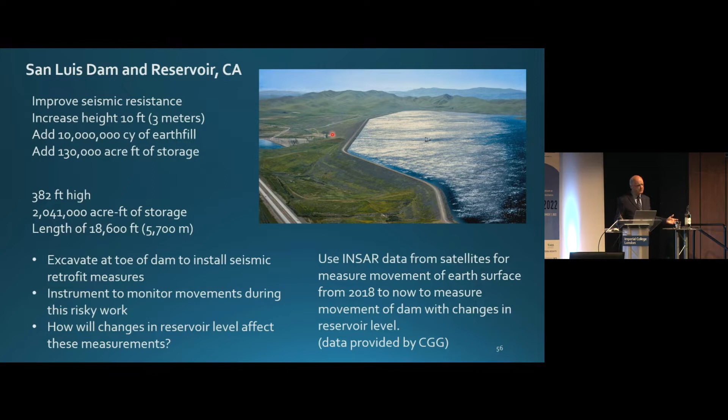Our good friends at CGG pulled up some INSAR data for us on this dam for the last four years, showing an average rate of movement of about 5 millimeters per year over that period. This is just an example showing how that movement occurred over those 4 to 5 years at a specific point - you get a point cloud, but can pick out specific points. These are points where we're going to be putting in instruments, so we'll be able to look backward in time at how those points moved, and this is already enough data to tell me we're not going to have to worry about this problem.

This movement, by the way, occurred with a 180-foot drop in the reservoir level. So the movement is small, and this is very, very valuable and powerful stuff to us. I'm pretty excited about what INSAR is going to do for us in looking backwards.

How did we get to today? New technologies will bring great value, provided we use them properly, we don't oversell them, and we provide results in understandable and actionable form that can be trusted.

One more point, then I'll wrap up with one slide. Monitoring programs - and this is a new point, I haven't said this before - monitoring programs without a champion mostly fail. What the hell do I mean? I mean somebody who's passionate about the monitoring on the project and willing to go fight for it, willing to keep the budget intact, willing to explain to others why this work is important to the project.

Success on a project really requires someone with access to budget control to explain the purpose and benefits of monitoring on the project and to fight for a reasonable and continued budget. Don't let that budget get knocked down and someone says, oh, we'll just cut out some of the instruments. The instruments are there for a good reason if you designed it right, so fight for keeping them there. This champion can help do that.

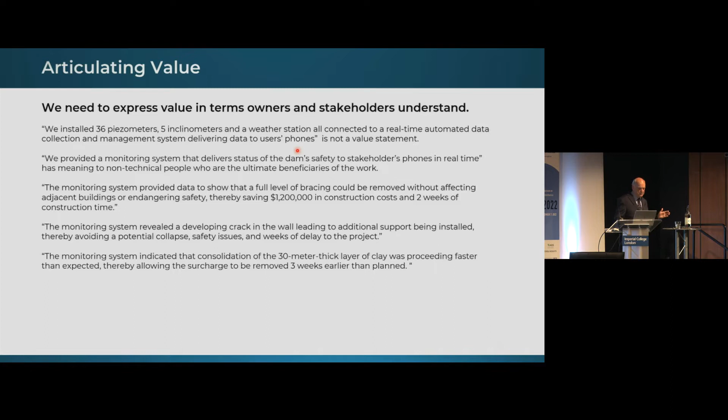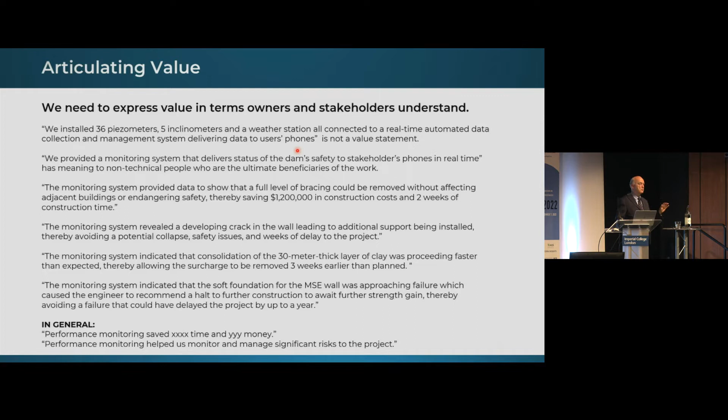In general, at the very bottom, performance statements like 'performance monitoring saved X amount of time and Y amount of money' or 'performance monitoring helped us monitor and manage significant risks to the project' - those are value statements. So, closing, last slide.

One of the most valuable results of an effective monitoring program is when it reveals unknowns we didn't consider. It gives us information and time to implement responses immediately to manage safety, risk, time, and money. How many jobs have you been on where something happened that you never expected, but the instruments told you and gave you time to respond? That happens to me over and over again, and that's immensely valuable.

We need to extract value derived on our projects and lessons learned from monitoring, both for successes and failures, and do so as the project progresses. It's too late when you come after the project and try to figure this stuff out. You really need to get in the habit of, hey, we saved the client today, let's go into the project record and make sure we grab that, because by the time you get to the end of the project, much of that information is lost, gone, and it's hard to retrieve.

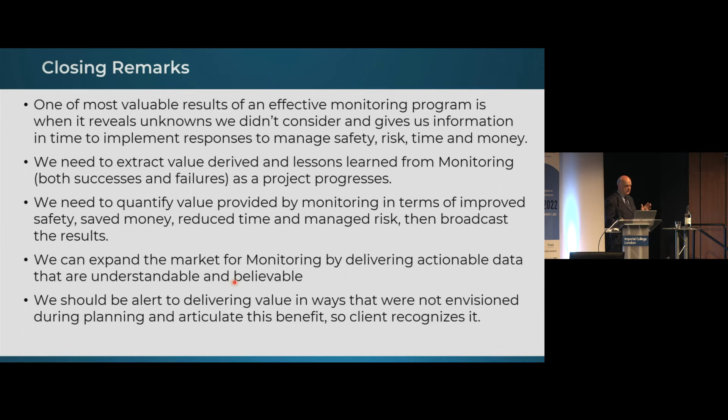We need to quantify value provided by monitoring in terms of improved safety, saved money, reduced time, and managed risk, and then broadcast that out. We can expand the market for monitoring by delivering actionable data that are understandable and believable. We should be very alert to delivering value in ways that were not envisioned during the planning stages, and make sure we call out that benefit and tell the client about it. You know, you do a good deed for a client, if you never tell them, they never know. So I think we need to do a better job of communicating the results from these splendid monitoring programs you all get involved in.

So I went a little bit long, but had a lot to say. I hope that was useful, and I really appreciate the opportunity.